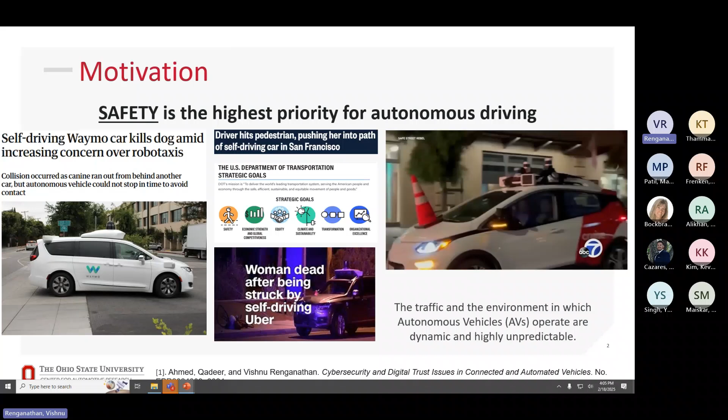Yes, it's indeed a dumb thing to jump in front of 10 meters in front of an autonomous vehicle. So is the controller actually well designed so that it can handle such a situation is what we are going to see through in this presentation.

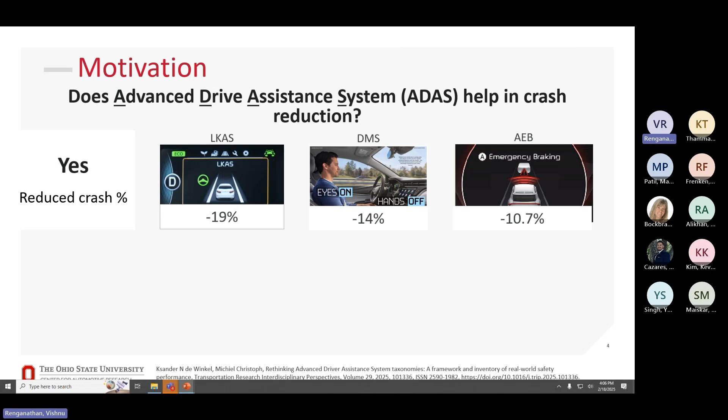Most ADAS systems help in crash reduction. As this study perfectly shows us, does the ADAS system actually help in crash reduction? Yes and no. Yes, it reduces crashes in cases of lane keep assist, where it reduced crashes by 19%, driver monitoring system, which contributed 14%, and emergency braking, which contributed 10%. But also no, it increased the crash rates while operating in cruise control and adaptive cruise control.

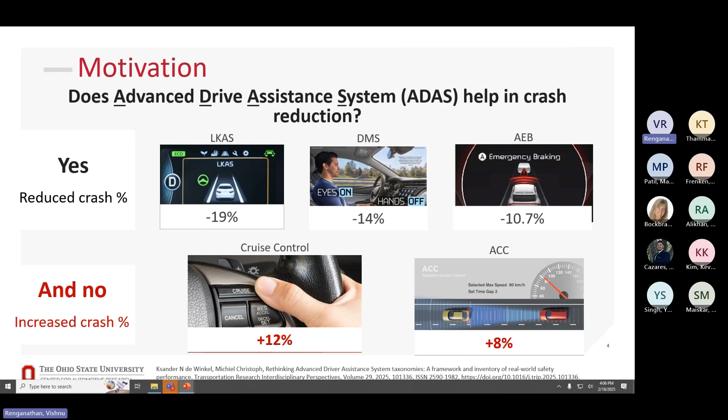So does that mean - this should actually be an open-ended discussion - does it mean the public is overly relying on these technologies without a comprehensive understanding of how these systems actually work? Are the general public well informed on how these systems work and what are the safety fields in which these ADAS systems are designed to operate in? Are they well aware of the ODD? So this remains an open-ended question.

But in this presentation today, we will see how we started a journey from the AutoDrive vehicle, which is a very well equipped vehicle with 3 LiDARs for front perception. We have 3 cameras and 1 long range camera. We have a GNSS sensor with multiple GNSS antennas, and we have real-time kinematics, which gives us very precise centimeter-level accuracy GPS signal.

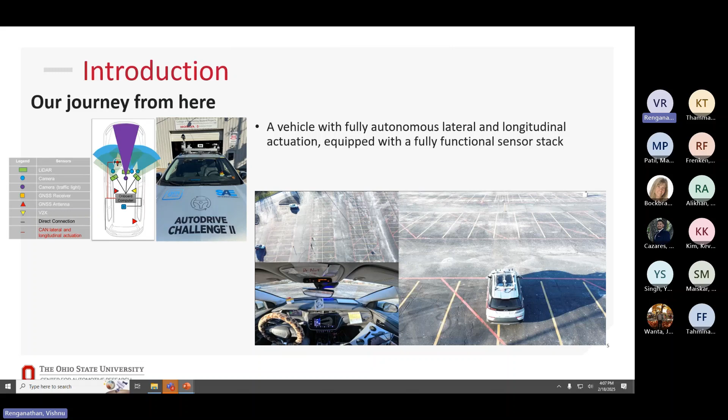It's embedded with V2X, which enhances the vehicle's localization and environment perception ability. So we have a really powerful onboard computer, an Intel machine, which we use for the entire autonomy stack. This presentation is where we took an autonomous vehicle and put it in front of a dynamic obstacle avoidance scenario with safety control for fast execution on nonlinear systems.

Here the vehicle is completely autonomous and it avoids the static obstacle. And in the first case, you saw a dynamic obstacle in the environment and how it navigates safely with fast execution on nonlinear systems.

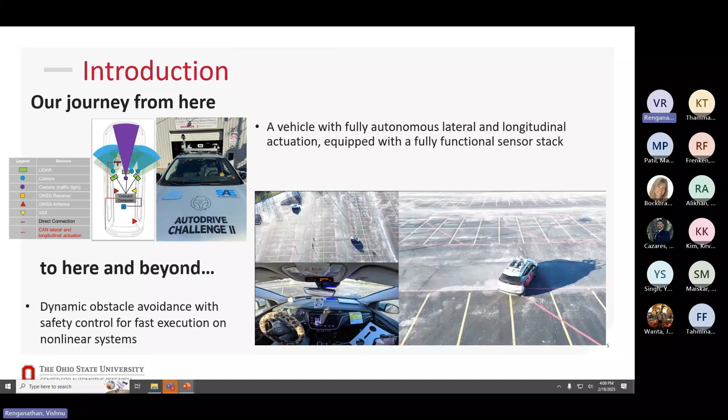So to start with, what is a safe control? The safe control in theory is defined through controlled invariant sets. Let us consider a set Xs, which is the set of all admissible states.

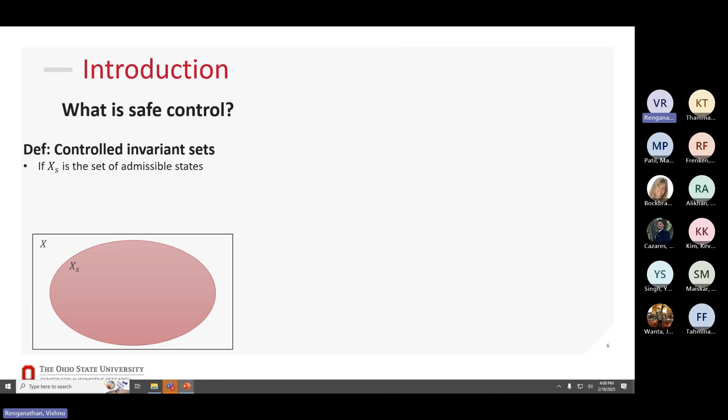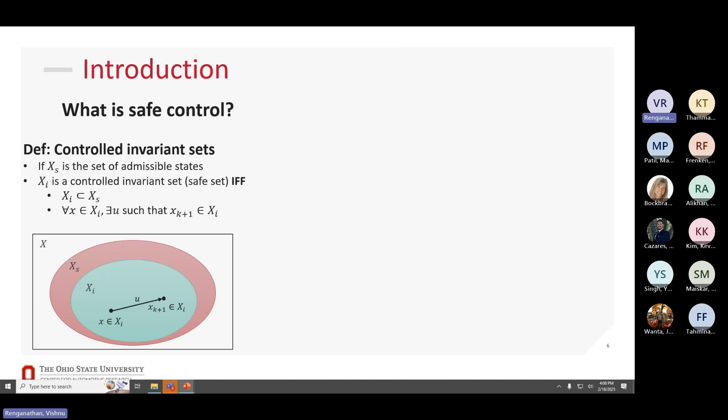Xi is a controlled invariant set, or a safe set, if and only if Xi is a subset of Xs and there exists a control U such that for all X belonging to Xi, it could render the next state of the entire system, upon implementing the control, to be safe. So here you call it a controlled invariant set.

With this definition, where do we actually start? We have, as I said, a very well-equipped sensor stack, a very well-defined perception algorithm, and control which starts from behavior modeling based on a finite state machine. We have path planning, an MPC controller, and safe constraints which we could implement on the MPC controller.

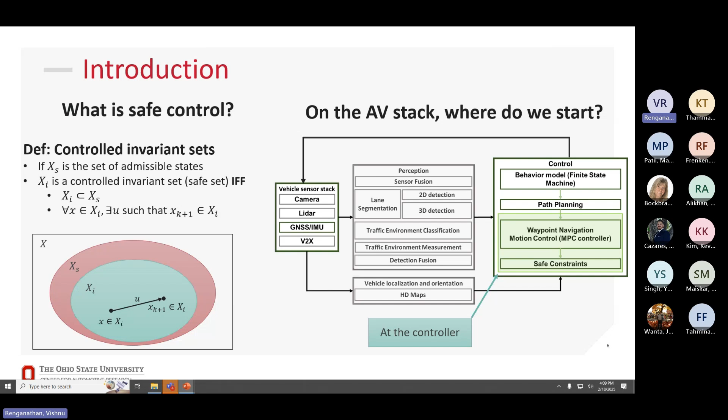So we start this presentation with the MPC controller. We assume the rest of the pipeline is very well established and that we get data from the rest of the pipeline in the perfect way. So starting with the MPC controller.

The first question: why an MPC controller and not any PID controllers, which have huge results established and used for the past few years? So, the MPC controller is an optimal controller.

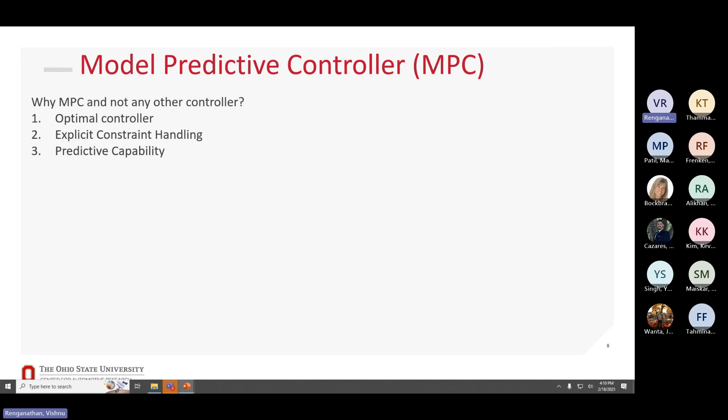It could handle explicit constraint handling, which means you could define constraints on which the MPC operates. You can define how an input is derived based on the constraints you provide to the MPC. The final advantage of using an MPC controller is the predictive capability -- it predicts the control and states over a time horizon.

So we start with the current state measurements which we get from the vehicle -- the sensor stack, the GPS position, the environment perception -- which we get from the vehicle, and then we build the MPC controller based on this data.

The MPC controller itself has three submodules: the vehicle model, the constraints we define in which the MPC operates, and the cost function, which is used for the controller to provide the navigation.

Based on the reference set point, the MPC controller produces a predicted output and an optimal control for a time horizon. We declare this time horizon as a design parameter of the MPC. Based on the optimal control input, we implement the first step of the optimal control input to the vehicle.

We repeat the entire process again: we make the state measurement, pass it through the controller, predict for the next time step, and implement just the first step. So even though we have a prediction, we implement just the first step, making it optimal over the horizon.

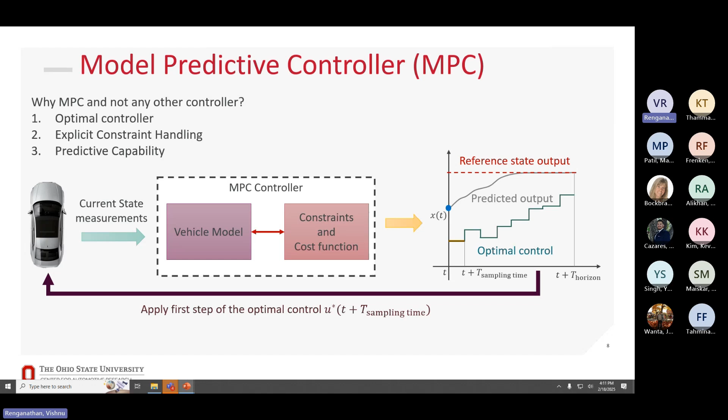Going back, we start with the vehicle model, constraints, and cost function. To start with the vehicle model, we use a vehicle kinematics bicycle model, defined by the X and Y position of the vehicle.

We have the slip angle, given by beta. We have the yaw angle, given by psi, and the velocity under which the vehicle travels, given by v. LF and LR are the distances from the center to the front and rear wheel respectively.

So we have a discrete time vehicle dynamics model, defined by the slip angle beta, X position, Y position, the yaw angle, and the velocity. Thus the states are X, Y, yaw, and velocity, and the inputs are acceleration and steering. The acceleration A includes both acceleration and braking as inputs.

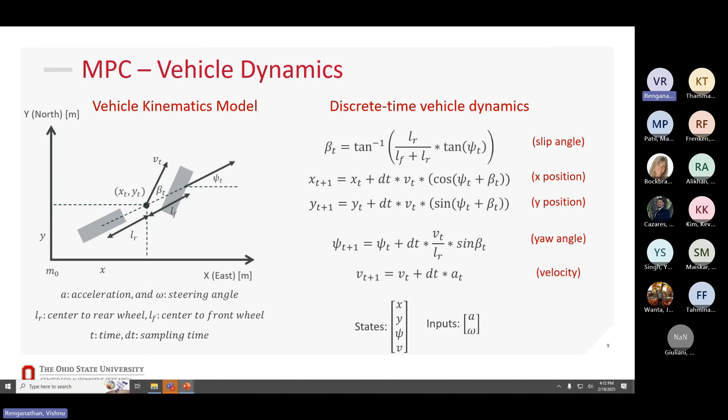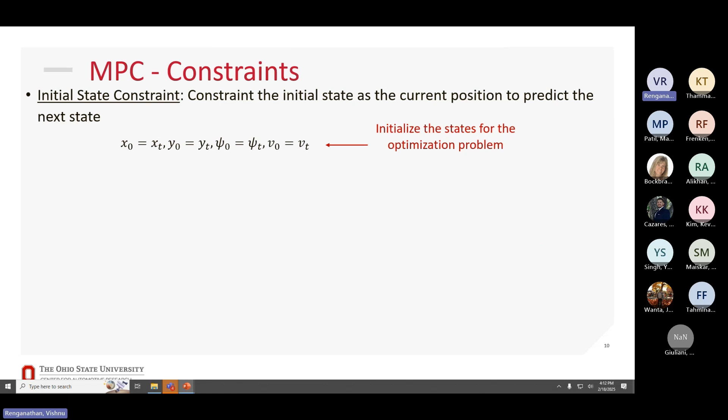Moving on to the second step, defining constraints in MPC. We start with the initial state constraint, where we initialize the first step of MPC at each time step to the current position -- this optimizes the calculation. So you don't start all the way from the back; you start at the current position of the vehicle and initialize the optimization, so it's quicker to achieve the minimum of the optimization function.

The second one is the state bound constraint, where we specifically impose state bounds on the vehicle velocity. This helps in safe navigation and collision avoidance -- we obviously don't want to travel 85 miles per hour in a 35 zone. So we try to impose the maximum and minimum velocity, and also we don't want to stop abruptly in the middle of a highway.

We impose maximum and minimum velocity constraints so it remains bounded during operation. Then we have the input bound constraints, where we set a minimum and maximum value for the steering angle and acceleration. We don't want infeasible actuation, like a steering angle the vehicle can't handle, so we bound both acceleration and steering with min and max values. We call this the input bound constraints.

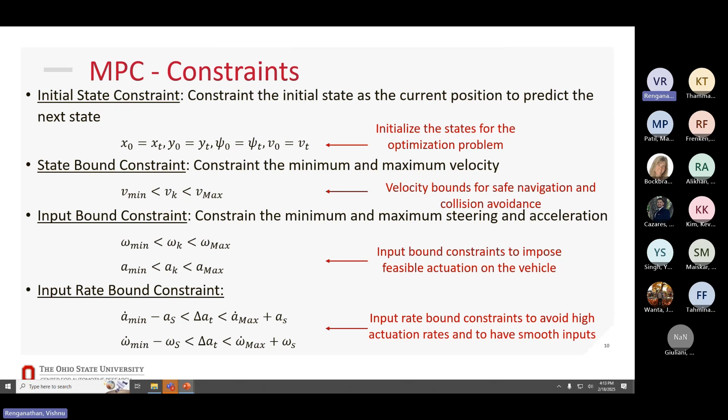Finally, we have the input rate bound constraint, where we set rates on how much the input, the acceleration or steering, could change over time. This is mainly to have a smoother input, since we don't want extreme acceleration or steering that causes an unsmooth ride for passengers in the vehicle.

Moving on to the cost function. But before that, let's see what reference waypoints are, and how we set and get them. The reference waypoint is just a trajectory where we want the vehicle to go autonomously. You have a start position and an end position, very similar to Google Maps. You give your current position and your final destination, and the set of GPS waypoints generated that take you from start to end is the reference waypoint. We get this information from the global path planner.

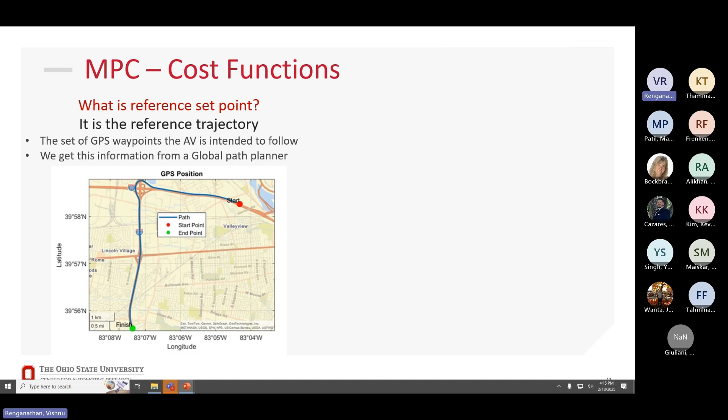It looks good when we have it in latitude and longitude, but for the controller it's easier to optimize when things are in meters, in SI units. For perception too, it's easier to identify things in meters, like an obstacle 3 meters ahead. So to get coordinates in meters, we do a coordinate transform into Cartesian coordinates, converting latitude-longitude to the ENU, east-north-up, coordinate system. Now everything looks neat: east is always our x-axis and north is always our y-axis. We transform our start and end points, starting from 0,0 to whatever the endpoint is in the ENU coordinate system.

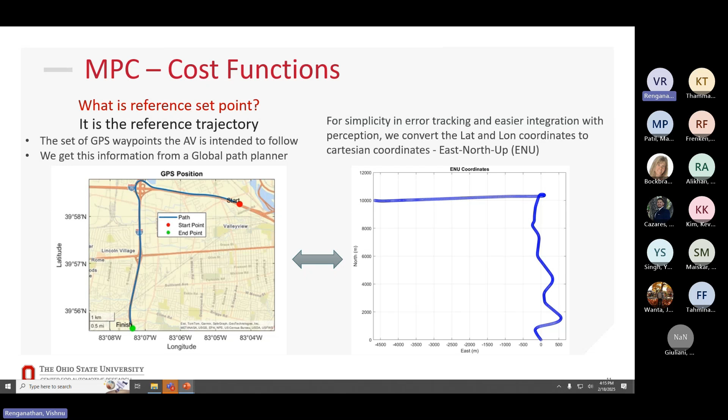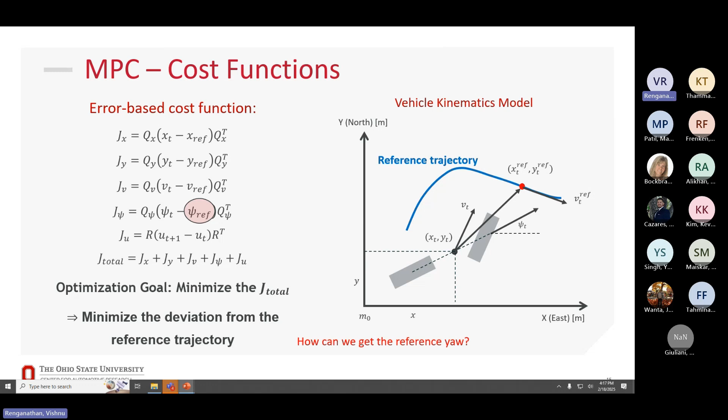Finally, moving to yaw ref - do we have a reference yaw? Actually, we do not. It's practically impossible to collect the reference yaw at each GPS coordinate across the entire map the autonomous vehicle will traverse. So how do we calculate the reference yaw? Going back to high school trigonometry, since each point in the reference trajectory is known, we can calculate the reference yaw by taking the tan inverse of y2 minus y1 and x2 minus x1, and use it as the reference yaw. It seems simple to implement and feasible in most cases - I'll tell you why in most cases.

When the car is facing east and we are traveling towards east, it works perfectly fine, because the reference yaw is 0 degrees, 0 radians.

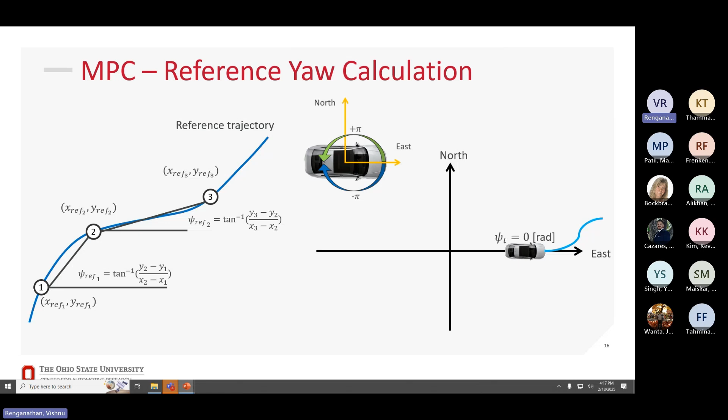If it's facing pi by 4, it's again feasible. If the car is traveling northeast, it's feasible, the reference yaw is pi by 4. It works if you're facing north, perfect. It works if you're facing south, where we consider a pi to minus pi scale, so it becomes minus pi by 2. It's again feasible if you're facing south. But if you're facing west, exactly west, do you consider it pi or minus pi?

And in addition to that, if you have noise in your measurement, which actually gives you 0.995 or minus 0.995, is this a problem? And if it's a problem, why is this a problem? So we did this set of experiments.

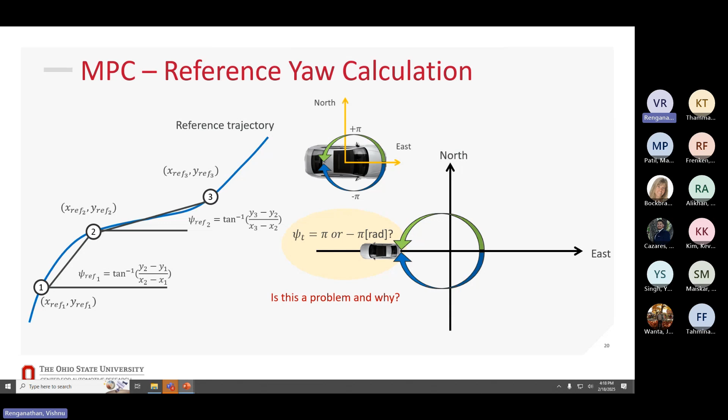We initially considered going from one point to another where it perfectly worked, but it did not work in some parts. Yes, because it causes a discontinuity in the reference tracking. So it works for some cases and did not work well for other cases.

When we ran this MPC controller by calculating the reference yaw based on the waypoint, we ran this from the charge station, which is right outside CAR, to the gate where we enter the CAR building. It ran perfectly well. We have the reference yaw that's perfectly continuous, and the MPC worked. We were happy, so we wanted to test this in more directions, starting in more directions and different orientations.

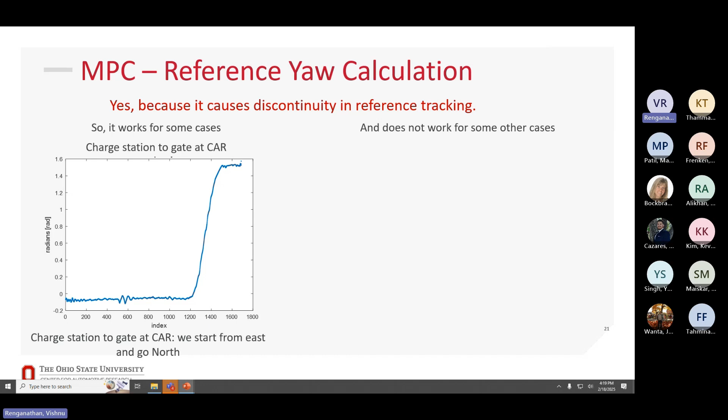We did the reverse of it. We started from the gate and wanted to go back to the charging station. It perfectly worked when we went from the charging station to gate at CAR. We start from east and go north. But now the other case, we start from south and go west.

So it causes a discontinuity as soon as we start turning left. What happens is that the steering goes into an extreme tracking problem and it gets into a wrong direction. In order to get back, it has to go an entire round to get back to the original position, which causes extreme steering uncertainty and takes the vehicle in the wrong direction. Actually, it's pretty ironic.

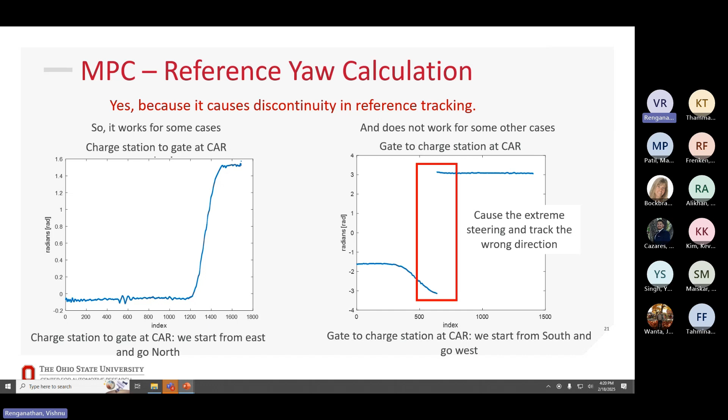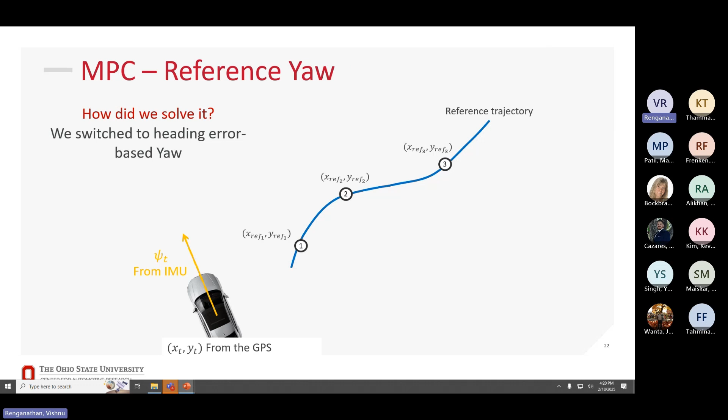From the GPS and IMU, we have the X and Y position, and we have the yaw angle from the IMU, measured from the vehicle. Then we have the reference waypoint, the closest waypoint that we know from the vehicle. So we calculate psi1, which is the angle between the current position and the closest reference waypoint. We know this angle by taking tan inverse of y by x.

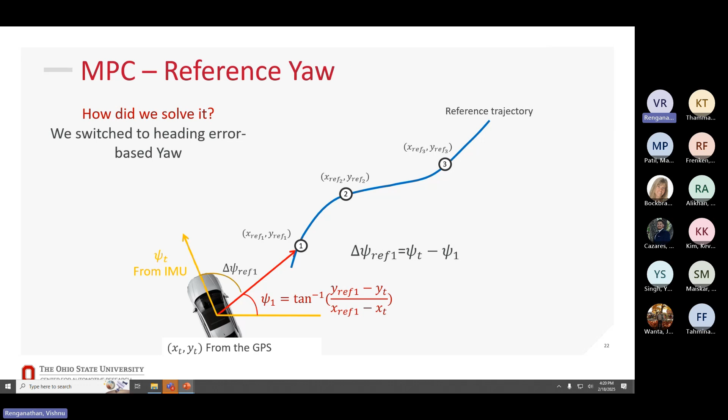Now we can calculate the required heading angle we need to get to that point. This is nothing but the difference between the measured yaw and the calculated angle. If we implement this, then we know exactly what the car should turn to get to the nearest waypoint. And did it work? Yes, it worked perfectly well in all cases, in all heading angles, all heading directions.

But before going further, we will go for a formal mathematical MPC formulation and see how we mathematically analyze if our MPC is performing well or not.

Here we have the cost function, represented by J, which is the squared difference. So we have a convex function. It is the square difference of the reference with the current state and the input, to minimize the input cost as well. We have the terminal cost, shown by P, and the cost function we calculated. We have the vehicle dynamics, input constraints, input rate constraints, and the terminal cost as constraints.

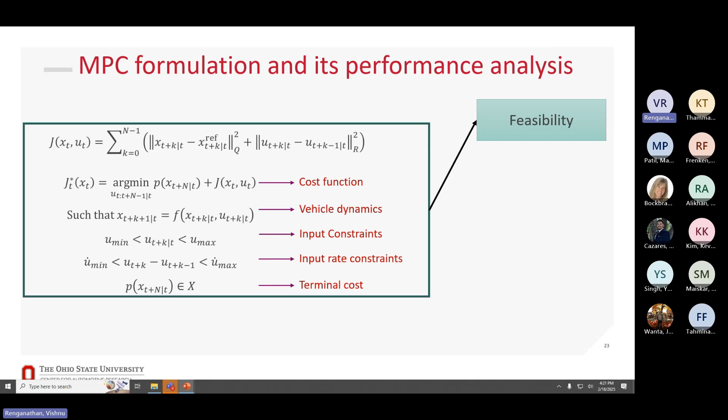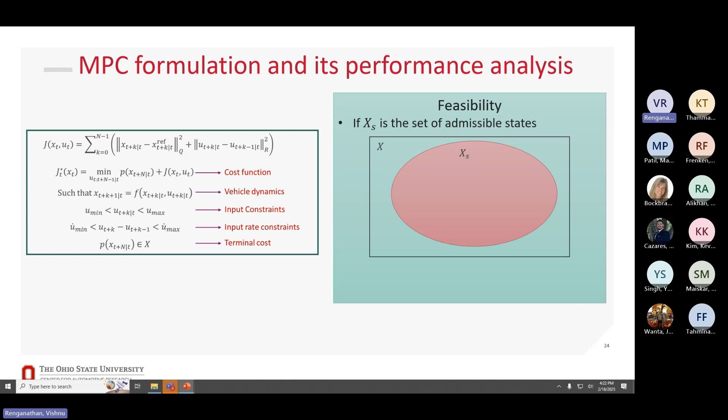So how do we actually guarantee or analyze the MPC performance? We have three factors to analyze the MPC performance: feasibility, stability, and optimality. Starting with feasibility, XS is the set of all admissible states. If we have a control input that's going to keep the entire state within the set of XS, then we have a feasible input. So the u which we input to the system to keep the vehicle within the set of feasible states is a feasible input.

Any input that takes the system outside the set of XS is an infeasible input. In simpler words, if the real-time MPC solver is not able to identify a control input that satisfies the condition to keep it within the set X, then the solution is infeasible. So if you go out of the set, the solution is infeasible, and any input that keeps the system within the set is a feasible solution.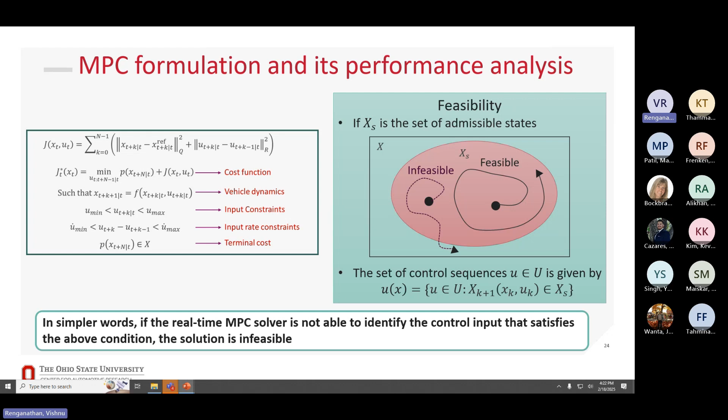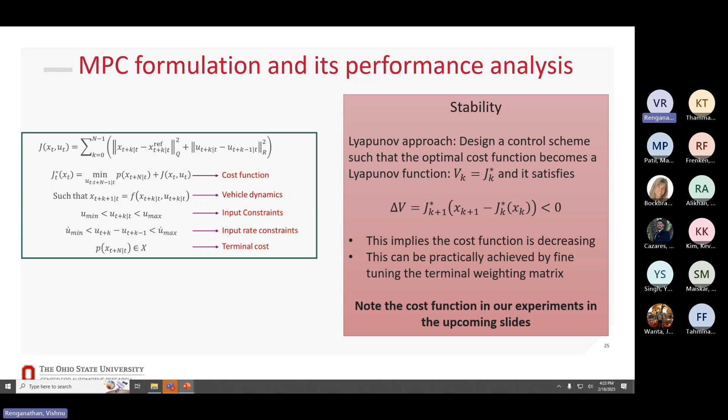So stability. We analyze the stability using a Lyapunov-based approach. We design a control scheme such that the optimal cost function of our MPC resembles a Lyapunov function, satisfying that the difference between the cost function of the current step and the next step is less than 0, giving us a decreasing cost function. This can practically be achieved by fine-tuning the terminal weight matrix. In a practical simulation, you can actually see how the cost function is being decreased, which states the stability of our MPC controller.

And finally, optimality. MPC usually results in a globally suboptimal solution. Since it's based on a time horizon, it's optimal within the time horizon, but globally it could be suboptimal. This is because if you have a smaller prediction horizon, it will be optimal only within that smaller prediction horizon. You could actually avoid this by increasing the time horizon to almost infinity, so that it becomes globally optimal.

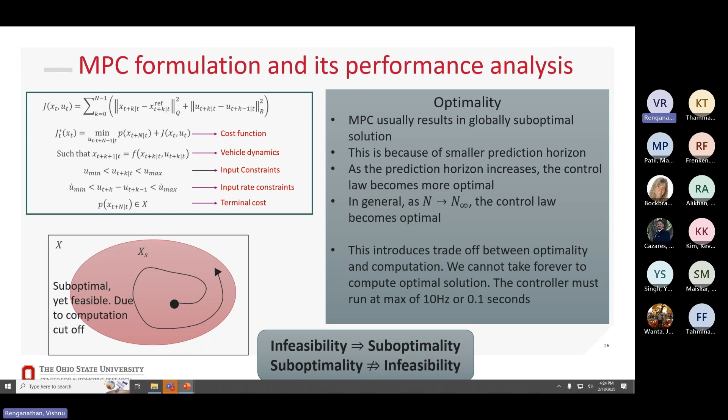But now this introduces a trade-off between optimality and computation. We cannot take forever to compute an optimal solution. The controller must run at 10 Hz, or every 0.1 seconds, so we need to implement a control input at that rate. So here we have a trade-off between computation and optimality. If we are not able to find an optimal solution within 0.1 seconds, we cut off our calculation process and implement the closest suboptimal solution. Otherwise, the controller will start losing control and start wandering around.

So what does this mean? We saw feasibility and suboptimality. An infeasible solution is one that's not able to stay within the closed set. In other words, infeasibility directly implies suboptimality, because you're not able to calculate the optimal solution that keeps within the set you've designed. But suboptimality does not always lead to infeasibility—you could still have a suboptimal solution and yet stay within the feasible set.

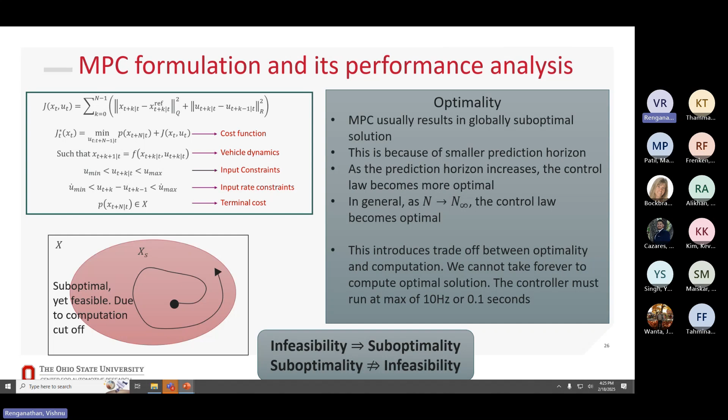So the suboptimality here is because of the cutoff time. Since we wanted an optimal solution within, say, 0.1 seconds, or 0.01 seconds at 100 Hz, we had to cut off the computation time and implement a suboptimal solution. But that still keeps you within the set X that you define. So suboptimality does not always imply infeasibility, but infeasibility always results in suboptimality.

And finally, MPC in action. We implemented this MPC on a standard S-curve, which we use for autonomous testing in AutoDrive. If you're able to drive it in a sharp S-turn like this, it will most likely be able to drive on urban roads. Here you see the green point, which is the target position. Like you saw in the first slide, you don't have a set target position in MPC—you keep updating the target position.

The second point plot you see here is the y-axis tracking and the x-axis tracking. You see the MPC updating and the reference updating at a time step a little ahead of the MPC. What you see here is the X tracking results, the Y tracking results, the yaw tracking result, and the total cost function, which reduces, proving the MPC is stable.

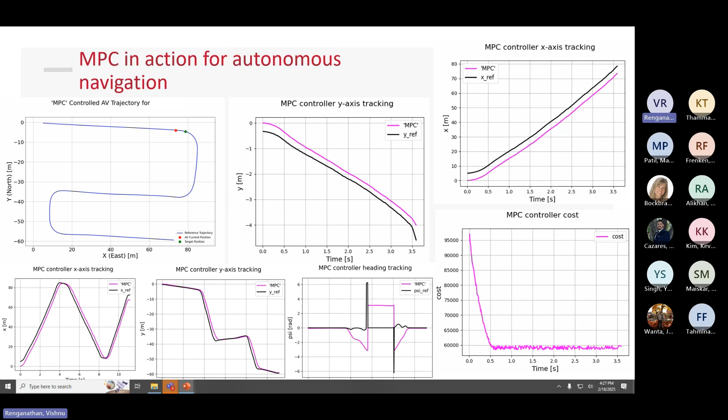So how do we work on a safe controller? The initial starting point is very simple.

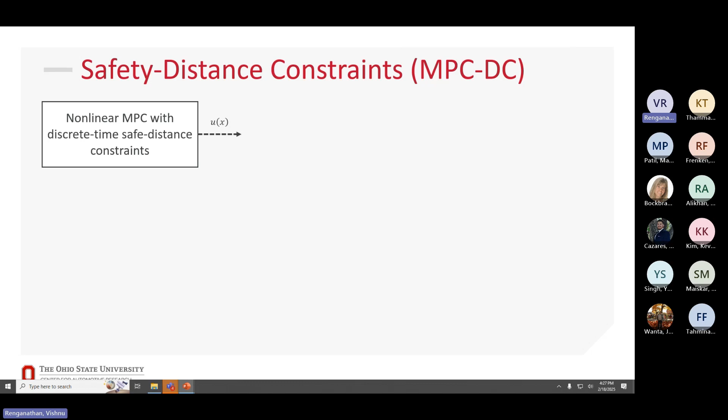We came up with a safe constraint and added it as one additional constraint to the MPC. So we had 5 constraints in MPC, came up with a safe constraint and made it a 6th constraint. For example, the vehicle has a safety radius, the obstacle has a safety radius, and safety is imposed through the constraint. You calculate the distance between the obstacle, add a safe distance, and add it as a constraint in the MPC. That's what we initially did.

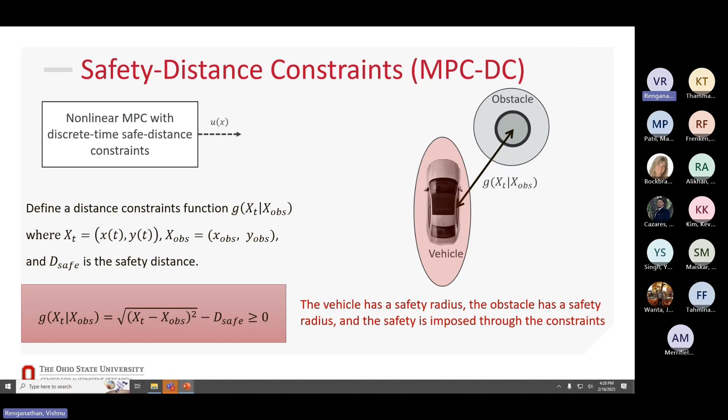So we defined a distance constraint, which is the distance between the vehicle and the obstacle. And then we add D_safe, a safety distance, and we always make sure the safe distance is always greater than 0. We added this as one of the constraints in MPC.

Did it work? Yes, in some cases, with a static obstacle. What were the drawbacks that made it not work so well? The safe distance constraint is implemented in discrete time formulation, limited by the discretization of time. The constraints are rigid, leading to infeasible solutions. It cannot maintain a safe distance, and you end up with an infeasible solution.

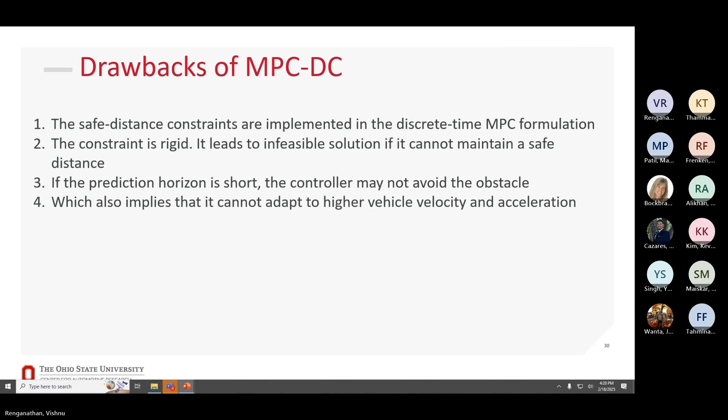The prediction horizon is short, so the controller may not be able to avoid the obstacle. This also implies it cannot adapt to higher vehicle speed due to the discretization of time and the control horizon, or if the vehicle has higher velocity or acceleration.

So moving on to the CBF implementation. Consider a nonlinear function x dot equal to f of x. We define a function h which maps from Rn to R over a closed safe set S. The function h of x within this safe set S is always greater than 0. In the interior, it is strictly greater than 0. On S, which includes the surface of the safe set, h of x is greater than or equal to 0, and inside the safe set, h of x is strictly greater than 0.

As you approach the boundary of the safe set, denoted by ∂S, h of x could be 0. Before that, as we move toward the boundary, we make sure h of x strictly increases. This gives a deviation from approaching the unsafe region and makes the vehicle move toward the safe region. As you reach the boundary of the safe set, you modify the control such that h of x increases and you move away from the unsafe region.

If you go into the unsafe region, h of x becomes less than 0, meaning you've gone away from the safe condition and outside the safe set, which does not imply safety. So now we have this function h of x and h dot of x, which make us move away from the unsafe region, and this can be implemented in discrete time domain and continuous time domain.

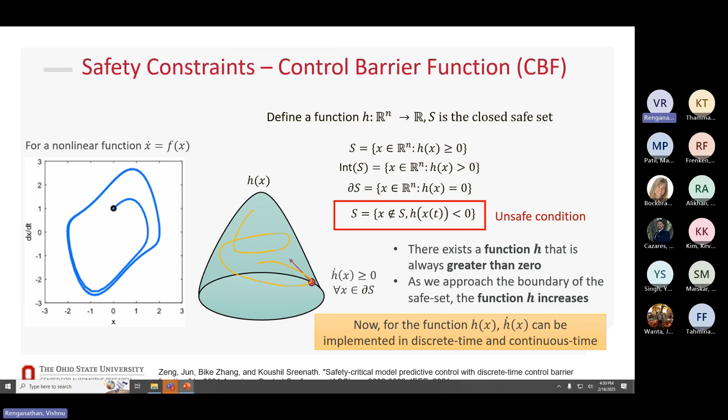In discrete time, which we initially started with, it was much easier to implement. For an n-step discrete time MPC, we implemented the h of x function as follows: for n time steps, you have the h of x function at time t plus k plus 1, and 1 minus gamma times h of x at time t plus k. When you have a control input, you implement it and predict where the state would go at time t plus k plus 1.

Then you calculate the control barrier function at time step t plus k plus 1, and that's your control barrier function. We make sure it's greater than 1 minus gamma times the control barrier function at the current position.

To simplify, we again have the distance constraint: the distance between the x position at t plus k plus 1 and the obstacle position, and the y position at t plus k plus 1 and the obstacle position, minus a safe distance. Similarly, for h of x at time t plus k, you use the current position of the obstacle and D_safe. So you have the current position, and then the position at the next time step after implementing the control.

So you calculate the control barrier function at 2 time steps, the current time step and the next time step, over the n intervals of the prediction horizon. The gamma that I initially mentioned is a positive coefficient and a design parameter, and it can be tuned.

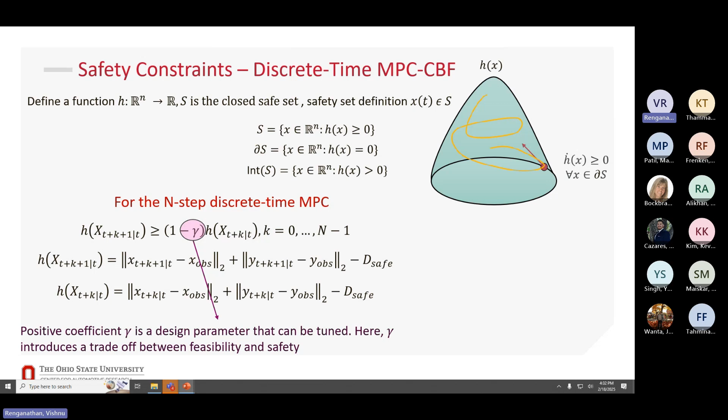This gives you a trade-off between feasibility and safety. The gamma has been implemented as 1 minus gamma. If you have a very small value of gamma, it prioritizes safety and you might end up with an infeasible solution. If gamma is very high, say 1, then 1 minus 1 becomes 0, so you prioritize feasible inputs and compromise on safety.

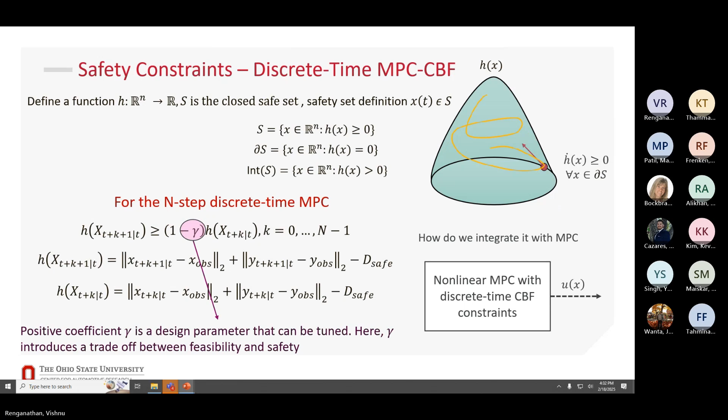So now how do we integrate this with MPC? We have an n-step control barrier function at one time step ahead and at the current time step, and then we add it as a constraint in the discrete time MPC formulation.

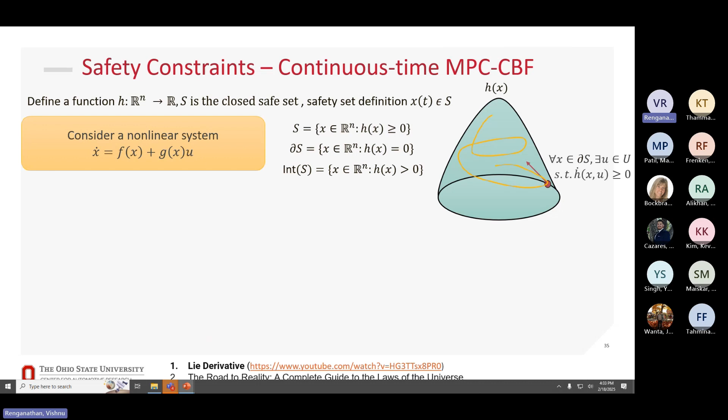Moving on to the continuous time case, we consider a nonlinear affine control system, meaning u is linearly dependent on the function g of x. We need to briefly introduce Lie derivatives. A Lie derivative evaluates the change in a tensor quantity as it moves along the flow of some other vector field.

With the Lie derivative in place, we come up with a safe controller where you find a control input such that the Lie derivative of h of x with respect to the state function, plus the Lie derivative with respect to the input function, is greater than minus alpha of h. Here h of x is a control barrier function, and any control that satisfies this condition will render the set safe.

With h of x as a general f of x, h of x, which again is the distance between the current position and an obstacle, we calculate h of x. We take the partial derivative of h of x with respect to x and y, then calculate the Lie derivatives: LF h of x and LG h of x, which are the vector field h of x, the partial derivative of h of x with respect to x, and with respect to y, along the functions f and g.

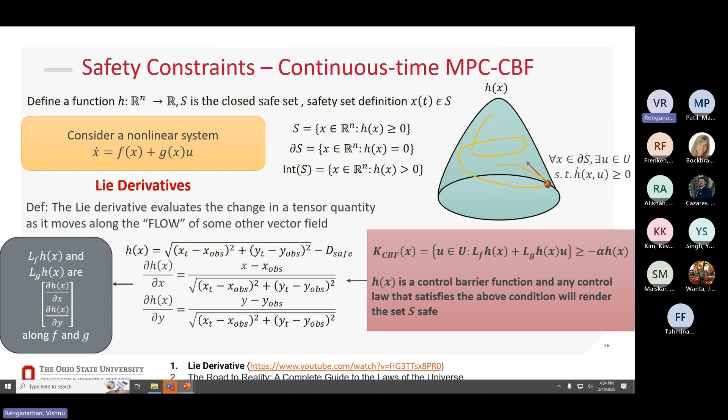So how do we implement this in the controller we have? We implement it through a quadratic program formulation. We have the MPC that operates and gives us the optimal control input at every time step, and then we pass this MPC control input to a QP, where the QP is implemented such that it changes the input in the most optimal way, making the set safe and keeping it within the safe set.

Any input you get from the MPC, you could actually replace this MPC controller with a PID controller or any controller, it just needs a control law. Then you have a quadratic program formulation, which modifies the control input in a safe way such that you remain within the safe set. The alpha you see here is again a design parameter, a strictly increasing class K function. You could have it as a constant, but in general it's defined as a strictly increasing class K function.

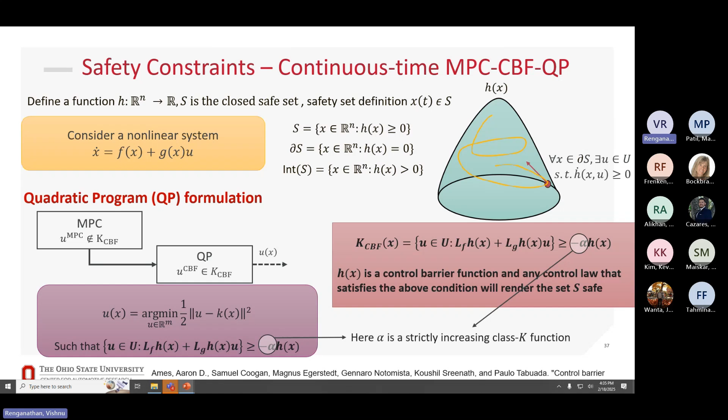To recap what we've seen so far: we started with the autonomous car from Autodrive, with onboard sensors and an onboard computer all set up. We have the control loop, which has vehicle dynamics, the vehicle sensor stack, and lateral and longitudinal controllers. Finally, we implemented MPC as a baseline model, and then three controller formulations which could lead us to safety: nonlinear MPC with discrete time safe constraints, nonlinear MPC with discrete time CBF constraints, and an MPC with QP formulation, which is a continuous time safe controller.

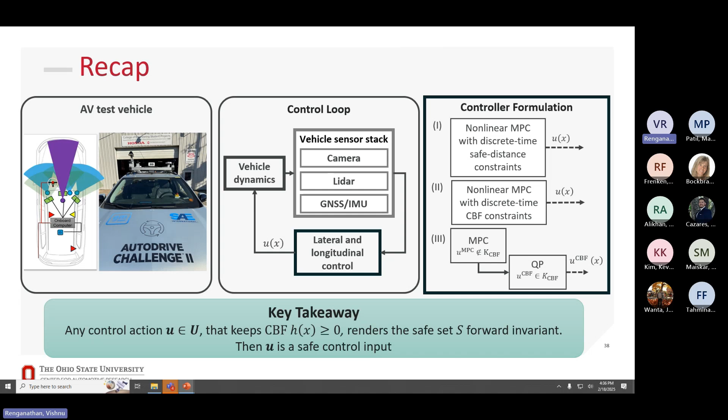The key takeaway from CBF is: any control action U that could keep CBF h of x greater than 0 and render the safe set forward invariant, then the control input U is a safe input. With that, I'll be passing on the presentation to the person I've worked with on this entire topic, and she'll be showing you testing and verification.

Next, we will discuss how we implement these numbers on the vehicle and what kind of scenario we try to verify.

The previous visual showed that we implement this on the AutoDrive vehicle and test the scenario in the Buckeye Lot. We also use Python controller to cooperate with other teams like perception or sensor teams.

We also have some predefined information, like the predefined reference trajectory, and we have the obstacle information, which we assume is already from the perception pipeline. Also, the real-time input is GPS, IMU, and the velocity from the CAN bus.

So here we have a safety analysis. We define 3 parameters: the first one is the minimum distance between the current vehicle position and the obstacle position, and the other is the safe criteria, which is the vehicle radius, plus obstacle radius, and the safety distance.

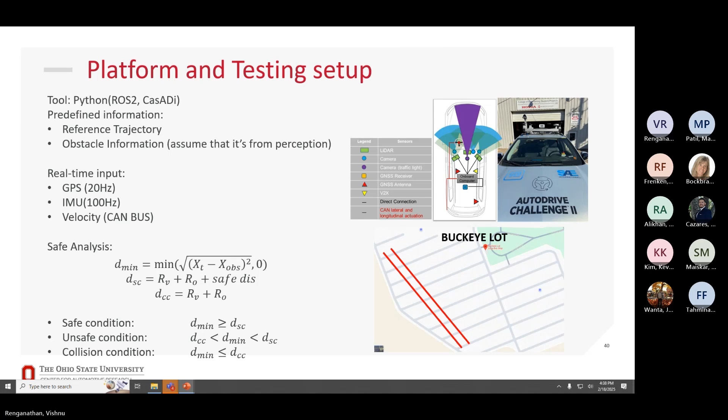We use CasADi as our optimization tool because it supports MATLAB, Python, and C++. Also, it's open source software. So we have some important features we are using.

The first one is we can output the whole optimization process - we know the iteration, we know how many times for this optimization. The other one is we can set up the computation cutoff - for example, we can cut off within 0.1 seconds, or we can cut off at 100 iterations.

The other important feature is infeasibility debugging, because sometimes you may set up a constraint that violates another constraint, but you might not know. So there's a tool that outputs all the infeasibility, so you can check which constraint you are violating.

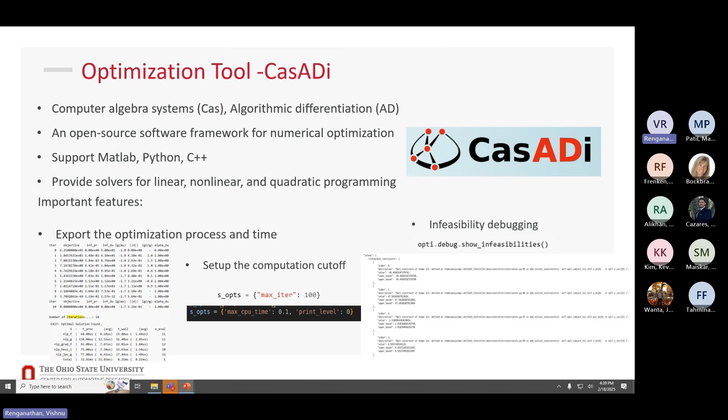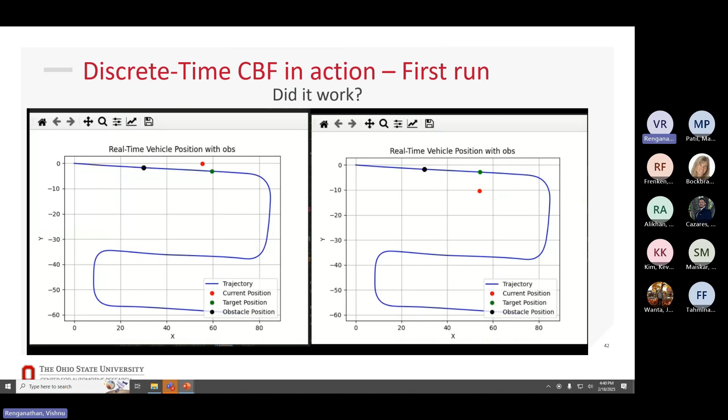But did it work? So this is how we tested it. As you'll see, we try to avoid the obstacle late. For this vehicle, it just goes somewhere around and then goes back - the vehicle just moves around everywhere.

So why does it happen? We ran a lot of tests and found that computation time is a big issue - it impacts controllability. If you have a really low control input update rate, for example 1 Hz, which means you only update your control input every 1 second, then even if your vehicle is traveling at a low speed, just 5 meters per second, the vehicle will move to the next 5 meters, and it's like a late control.

So for this, we tried to optimize our code - you cannot initialize your optimizer inside your loop because it's really time consuming. Once we moved the optimizer out of the loop, we reduced computation time by about 90%. Now, even though we include set constraints, our computation time is almost around 0.03 seconds.

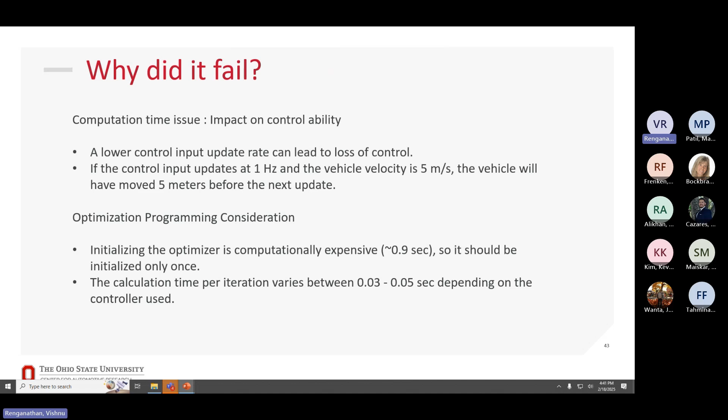So we implemented this on different scenarios. The first one is the static obstacle scenario - this is the most common scenario. We assume that we know the obstacle's position, and then we avoid the obstacle.

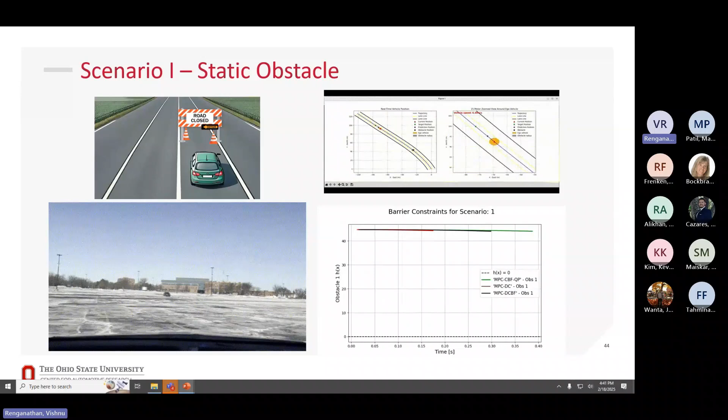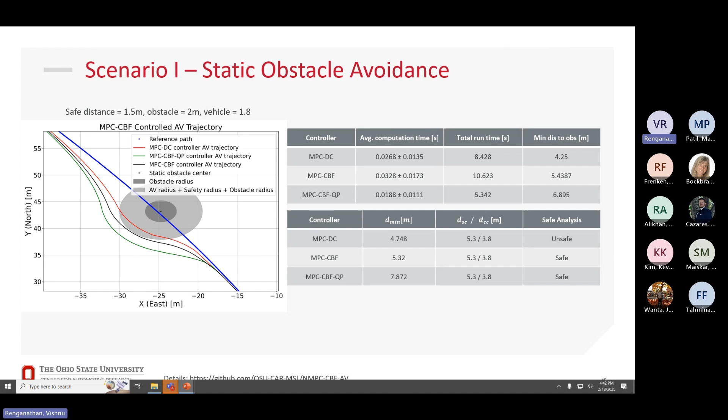So here we have the h of x with 3 different controllers, and this is the trajectory. You can see the total computation time here for different controllers. The QP is the most important, and the CBF and QP is for safety analysis, identified as safe. But for the other one, it comes into the unsafe area.

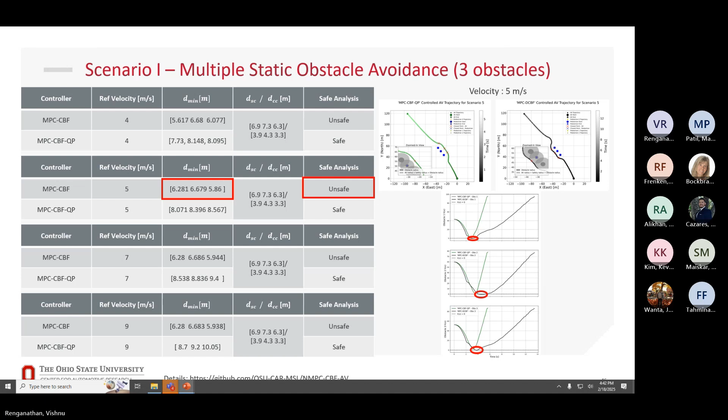And next one is the extreme case, like Vishnu discussed earlier. So we assume that there is a pedestrian who just jumps into the vehicle, and we want to see if the car hits the pedestrian or not. But Vishnu is still here, so obviously it's not Vishnu.

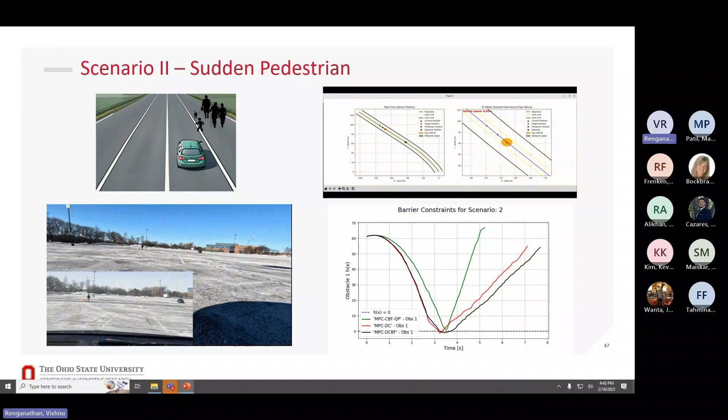Then we want to analyze more about the trajectory, so you can see the zooming plot here. In the distance constraint, it obviously stays in the unsafe area. But for the CBF, it cannot predict because it's like a sudden pedestrian dropping, so it cannot predict the position, and it still sits in the unsafe area. However, the QP1 still keeps the safe distance.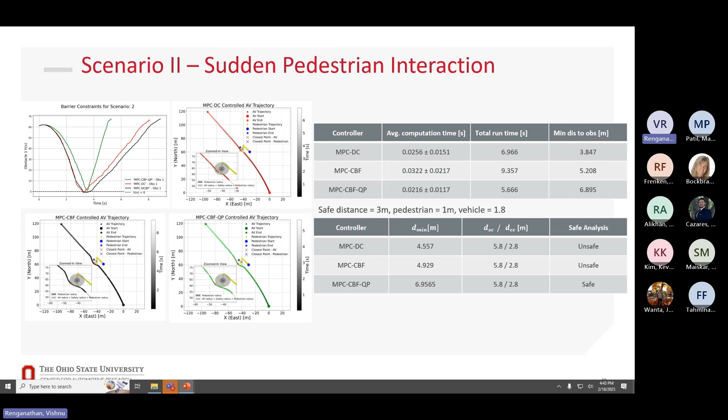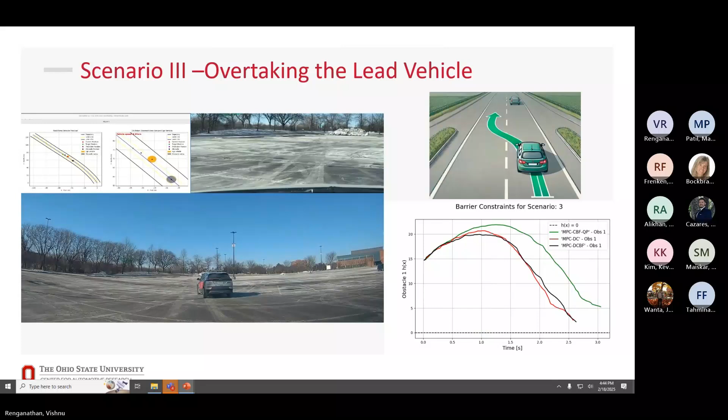And the final scenario is that we want to check the ADAS feature, or it's more like an overtaking scenario. In this scenario, we can see the QP formulation is trying to avoid the obstacle much earlier than the other two controllers.

So it's more like it must be a safe situation in this QP formulation. Also, you can see the MPC controller cost is variable because of the obstacle avoidance.

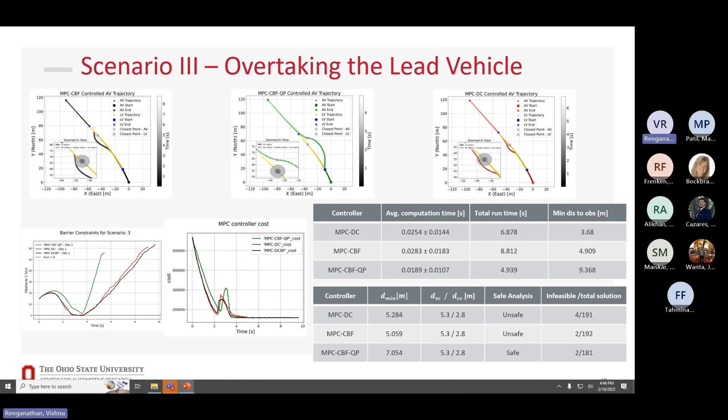Now we want to discuss the extreme case. This case is like 3 pedestrians sitting in a 20 meters by 20 meters area, and the autonomous vehicle will detect one of them within 5 meters ahead. In this situation, you can see it avoids the first one, but then this discrete time control barrier function hits the second. So in this situation, it will be identified as a collision.

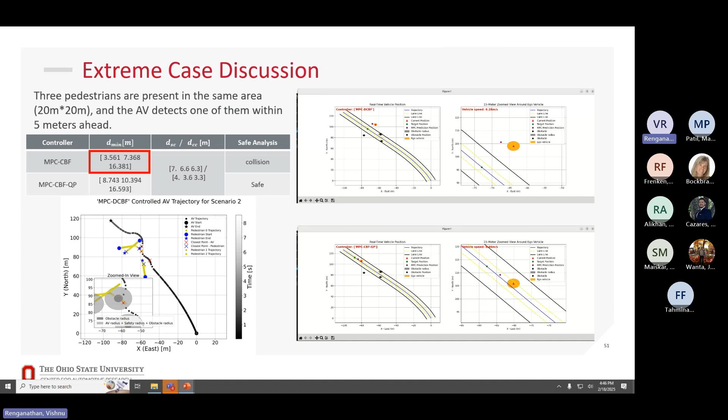Situation. But for this one, the QP1 will avoid this as well, so this QP is still identified as a safe controller. And why does it happen? In the previous theoretical part, we already know the QP formulation is based on the continuous time derivative, so it's more like it provides a field.

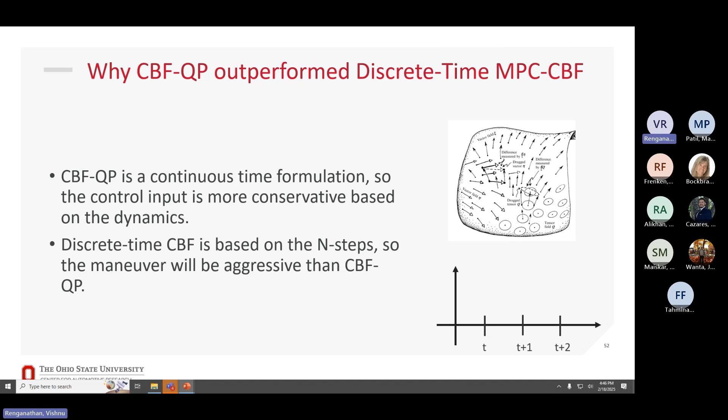So it's like a more conservative controller based on the dynamics. But the discrete time is only based on the prediction step, which will make the maneuvers more aggressive than the QP formulation.

So in our next step, we are exploring the safety guarantee under measurement uncertainty. We try to simulate by putting position noise into the controller. This is 0.1 Gaussian noise, and this is 0.3. Even for the QP, which should be the most safe one, it still shows unsafe situations in all the systems.

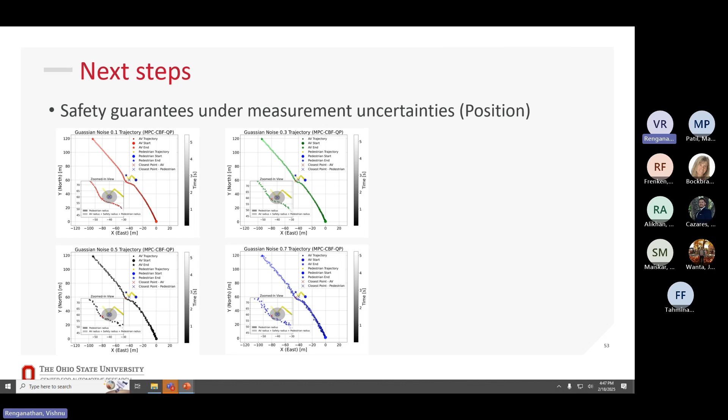So, summary. Back to the first question: will all this effort guarantee 100% safety? The answer is no. You can see in the extreme case, we might have a collision situation.

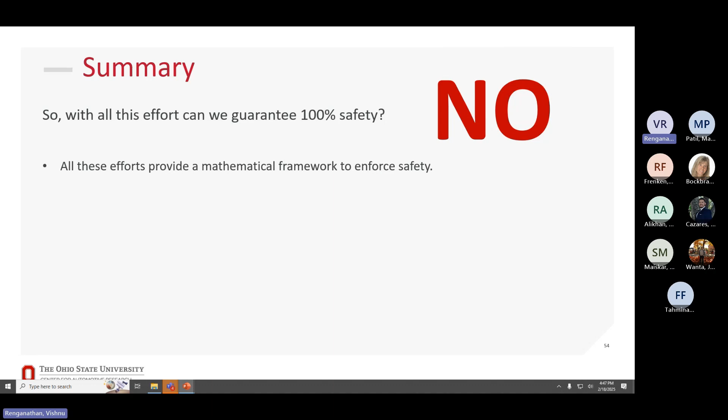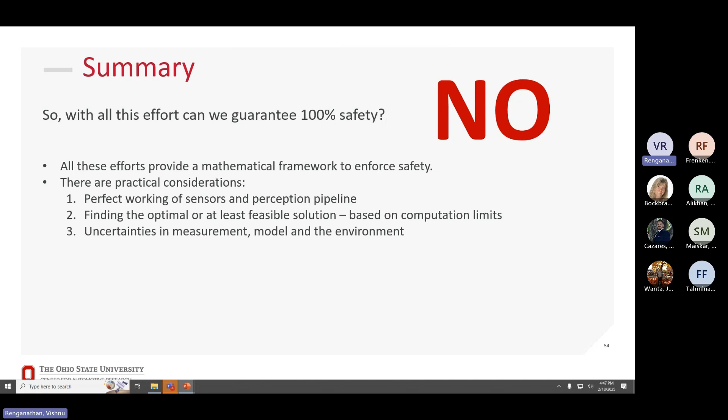And all these efforts are provided as a mathematical framework, and we also have some practical considerations. We assume we have perfect perception, perfect sensor patterns, and we find the optimal or at least feasible solution based on the computation. Also, we have uncertainty in measurement in practice. So thank you, any questions?

There needs to be a disclaimer, no graduate students were injured in the context of the conduct. I think she made a statement, since they both are here, so that's evidence, proof. And he was so confident in the algorithms that he would stand in the way.

So, any questions, comments? I will warm up the discussion. I might have a question.

Let's start. When you're discussing the safety constraint bounds, how did you come up with the minimum and maximum value? So for velocity, we just depend on the velocity range. In all our tests, we did not go at a much higher speed, so we considered around 10 to 20 meters per second, and within this range we had plus or minus 5 as the velocity. For now we had it fixed, but in future updates we plan to make it more velocity-dependent, as a function of the velocity.

Coming to the second one, steering, how did you evaluate the steering one? So it's obvious, because from the auto drive regulations we got a steering bound constraint that we need to follow. We don't want a steering situation that would provide an extreme left to right in a sudden maneuver, so the rate bound constraint is provided such that we respect the safety or stability of the passengers in the vehicle. So we just followed that constraint directly.

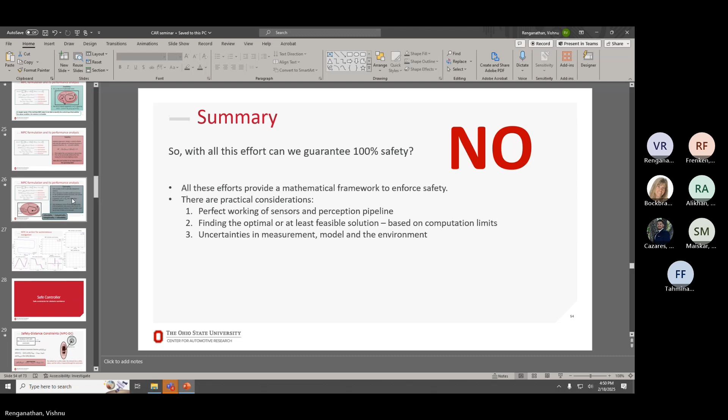Yes. So how do you define your optimality?

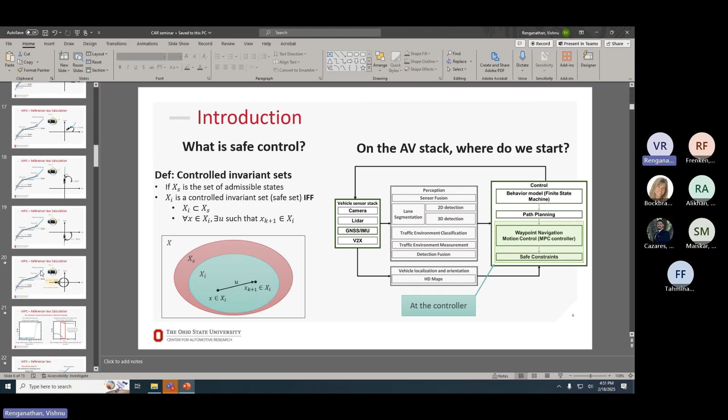If we go back even further, when we defined the controlled invariant set, we had two sets: red, the set of all possible states, and green, the set of safe states. In MPC, we consider the states to define optimality or feasibility at a high level, across all possible states. If we can come up with the minimum control effort that keeps within the defined set, that's an optimal control.

This also depends on the computation cutoff. Within 0.1 seconds, if you're not able to calculate the optimal input to implement, you cut off the calculation and implement the closest solution you're able to calculate within that time. That is the suboptimal solution. A suboptimal solution need not always lead to infeasibility - you could still stay within the defined set and have a suboptimal solution.

But if you have an infeasible solution, it means even with a very high calculation time, you won't be able to calculate that minimum input because there's no possible solution. How much were you cutting into the 0.1 seconds to get a feasible but suboptimal solution?

It depends on the controller formulation. In the QP formulation, the lightest formulation, we were able to come to an average of 0.03 seconds. In the CBF formulation, we came around 0.05 to 0.07. So you lead to more suboptimal solutions in the CBF formulation, since it's also based on the control horizon, leading to comparatively higher infeasibility and suboptimality.

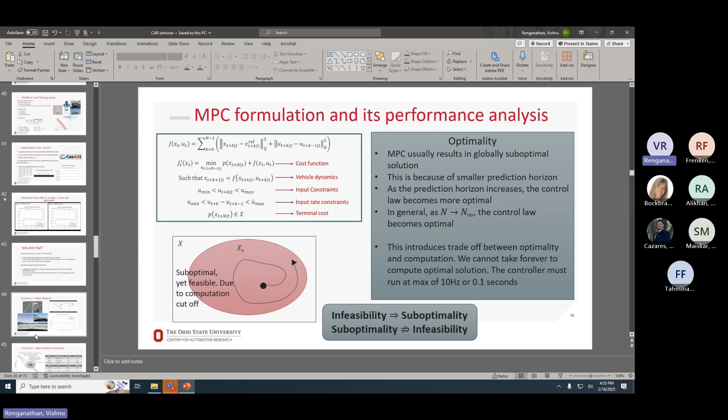What was your speed in the experiment? In an actual simulation it was 7-8 meters per second while testing on the vehicle, and in simulations we went up to 15 to 20 meters per second.

The simulation speed was more, right? But you cannot run with the same speed on the actual vehicle, because you need more computation power. We weren't able to test it actually.

So if you were to test at TRC, you could do this speed. It's not the onboard computing limit, we just didn't have the chance to test it - you weren't able to challenge the onboard computing.